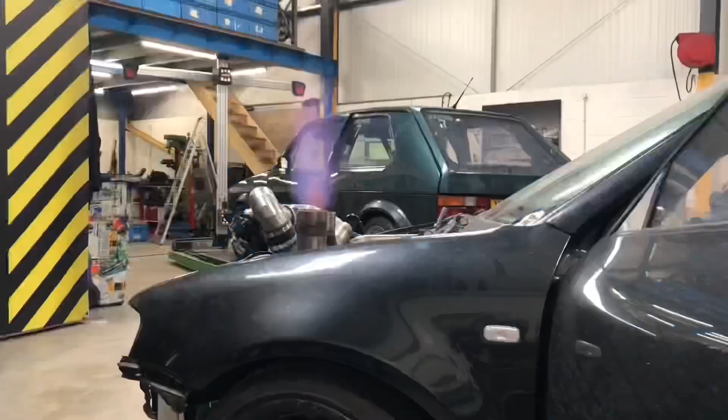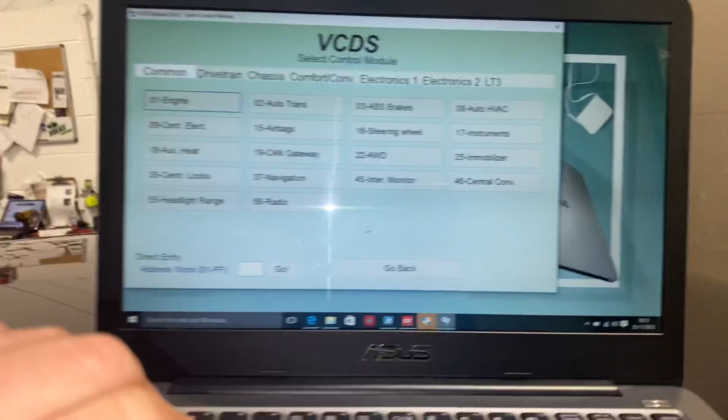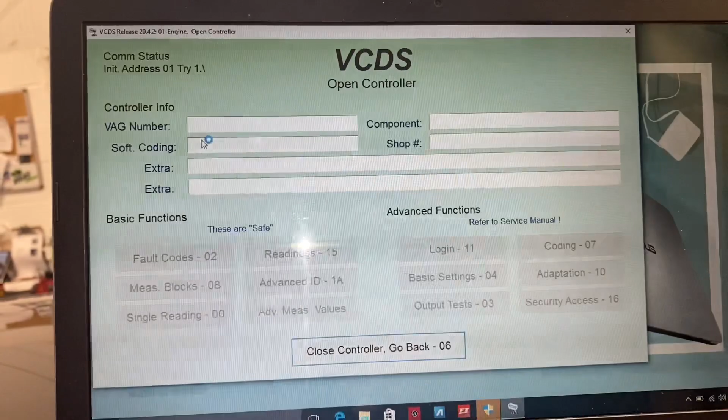Today we've got this Seat Ibiza FR 1.8T in for some diagnostics and a tune. So let's take a look. Every job starts with some pre-diagnostics, so we'll get plugged into VCDS, if I can reach it with my hand. Yeah, plugged in. Let's get that ignition on, and we'll give it a quick engine scan. See what we've got. We've actually got the engine light on, so there is going to be something in here.

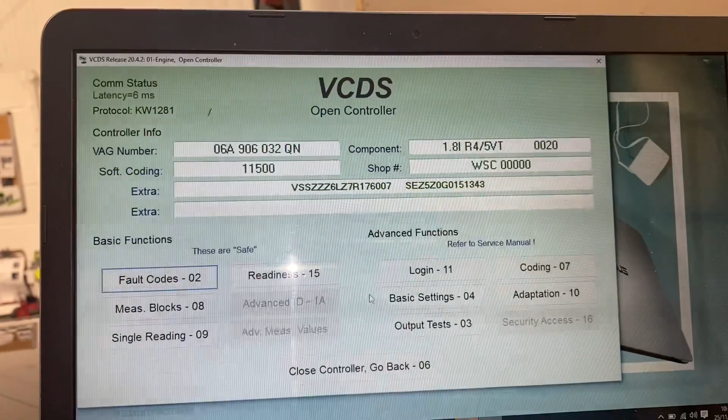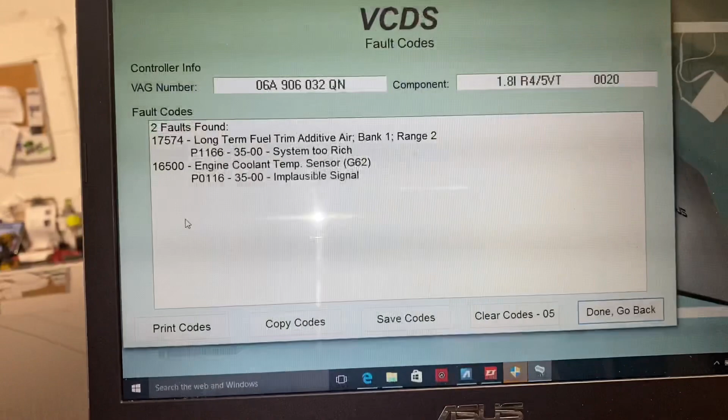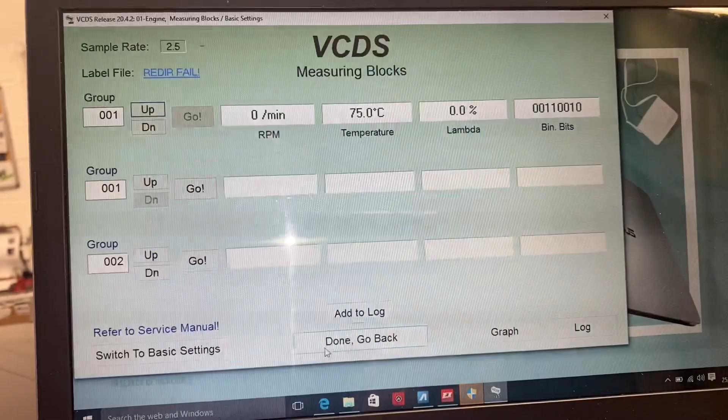Oh, I think I never looked at it then. That's not right, is it? Let's try it again. There we go. Long-term fuel trim, additive air, bank 1, range 2, system too rich, and coolant temp sensor, implausible signal. What does the coolant temp say? 75 degrees. We'll keep our eye on that, see if it dips or goes high during running the car.

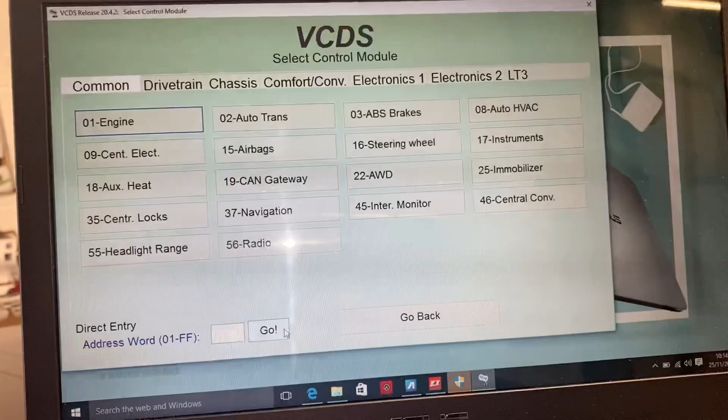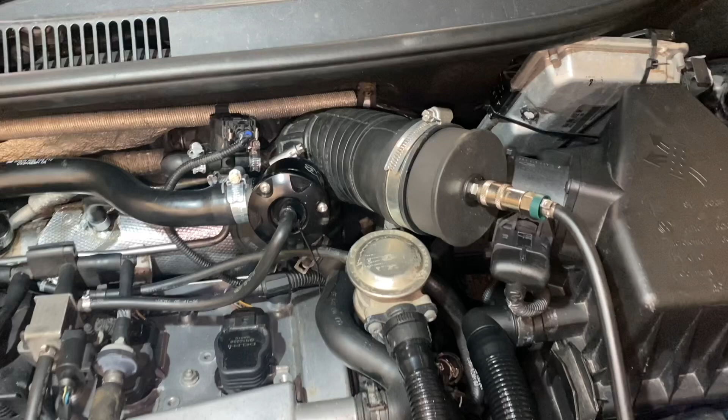Next thing to do is an air leak check. Any 1.8T job should start with an air leak test because they leak from everywhere. Yep, the high pressure test brings up faults, not a smoke test, unless it's a high pressure smoke tester. A lot of them can literally only do about 3 psi, which is no good to us. So we've got the trusty kit on, which is a high pressure kit.

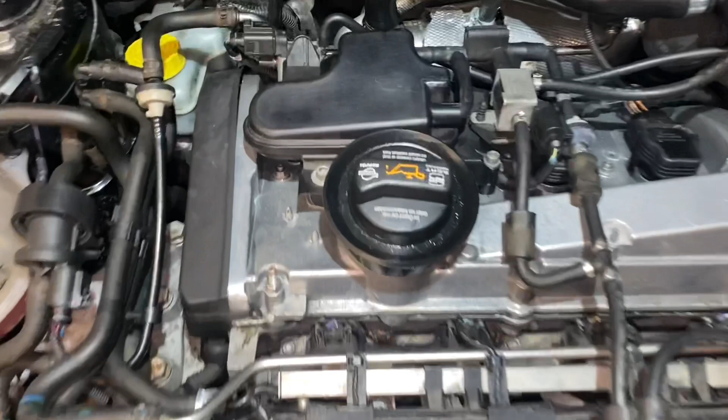Hang on, stop the video. I can see what's wrong with this vehicle. The eagle-eyed viewers out there may be able to spot it already. Look at that oil cap. Who puts an oil cap on backwards? Causes all sorts of problems. Should be golden now. Right, let's carry on.

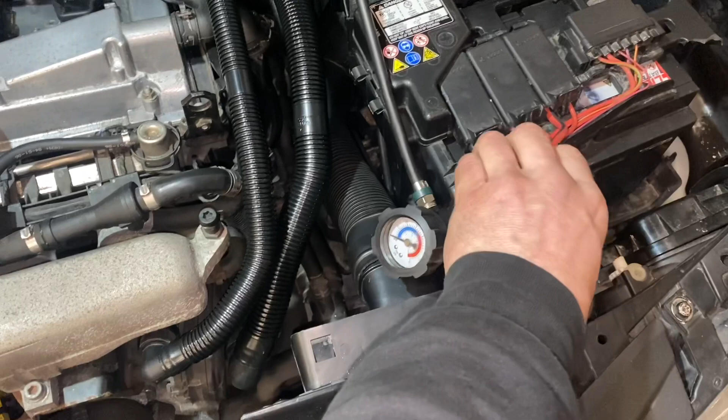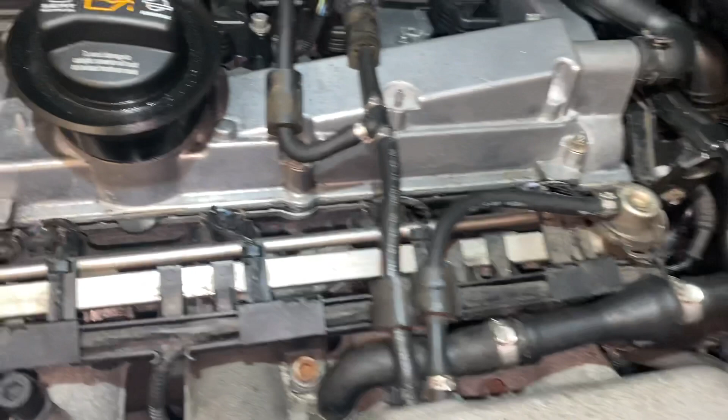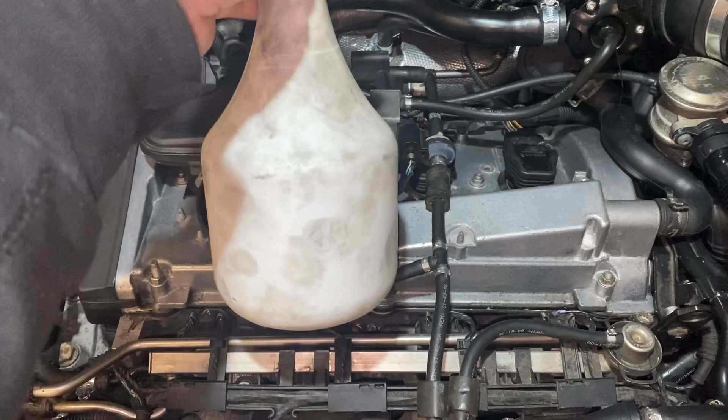So we've got the kit connected. Let's introduce a little bit of air. What are we putting in there? We're putting in 10 psi. Turn it up a little bit. And we've got our trusty patented boost juice, which is secret ingredients: washing up liquid and water. We'll give this a little spray around, doesn't do any harm. Get it in there. Some injector cups down there, intake manifold.

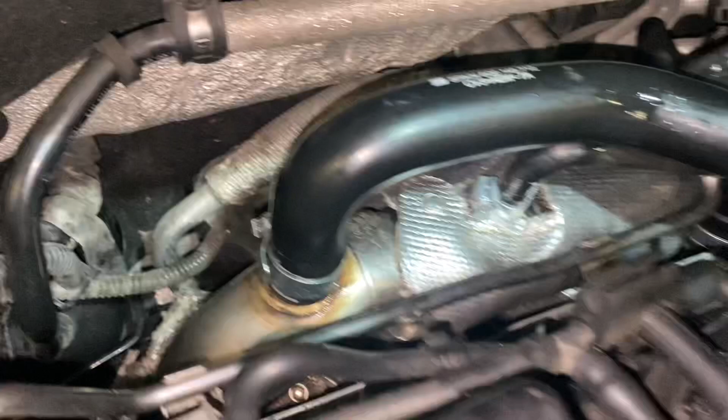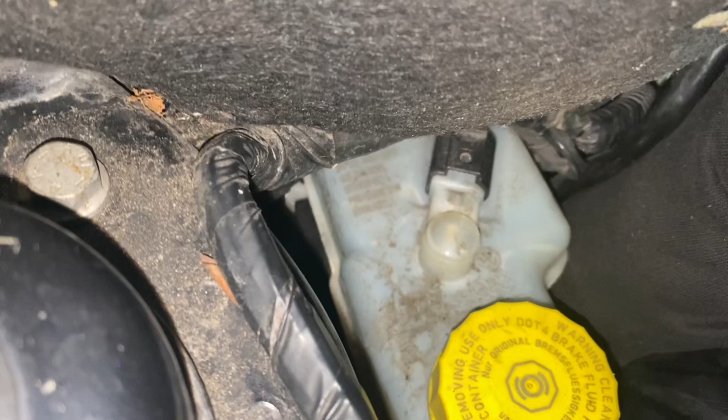I can actually hear something. Let me just have a look down here. Get my hand down here. This has got a push connector down, if I remember correctly. Oh, can you hear that? Oh, it's all oily as well. All right, okay. So, yeah, definitely got an air leak down there. So we'll take a look at that.

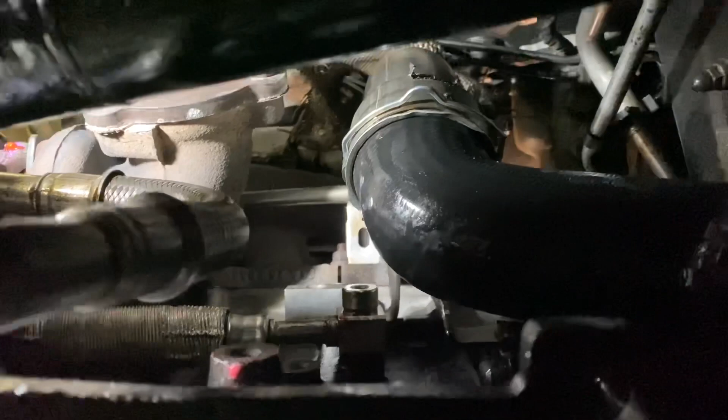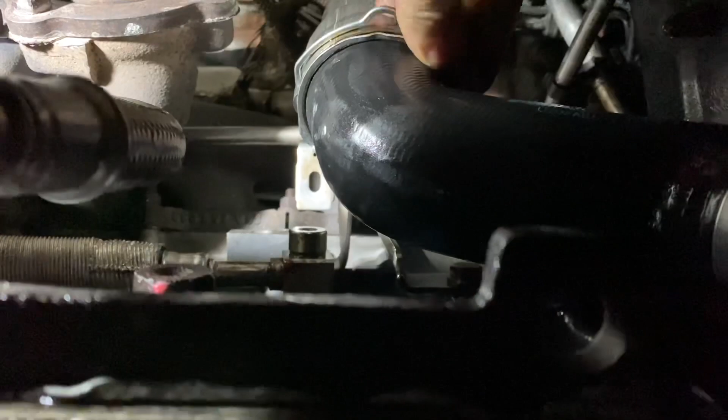All right, so we're underneath the car now. This is the push connector joint down from the turbo, and it's leaking from there. I'm only putting about 13 or 14 psi in there, and it's a massive leak. So we'll get this pipe off, have a look at the seal, and then we'll continue.

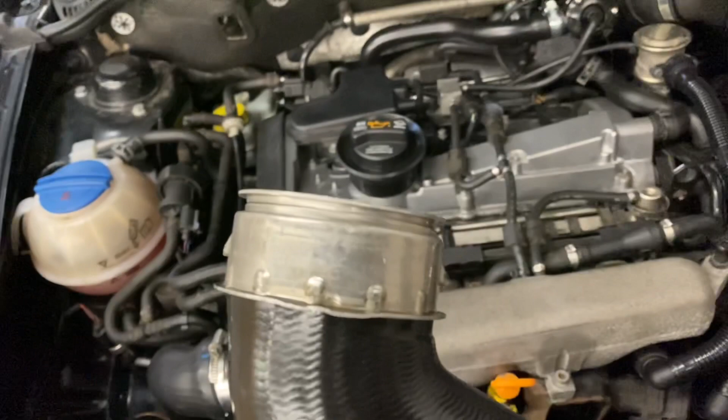Okay, so I've just got that boost pipe off from round the back that was leaking, and there's actually no rubber seal whatsoever on it. Should be around here. It's got 2 lugs that locate the boost pipe. It's kind of like a push bayonet fitting. There's no seal on it. No seal whatsoever. So no wonder it was leaking. I'll go and find some seals and we'll put it back on.

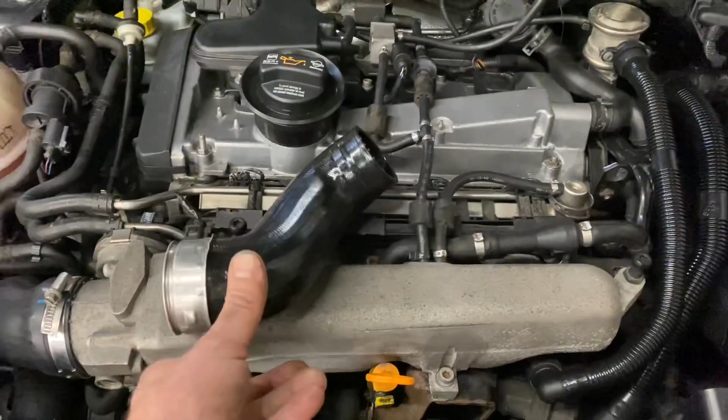As if by magic, I've got a seal in. I'll get this pipe put back on and we'll carry on with our leak test, see if it leaks anywhere else. And we'll go from there. Everything looks and tests okay for the leak check. So we'll disconnect all the kit and I'll get it on the dyno and we'll do some little logs and some pulls and see where we're at.

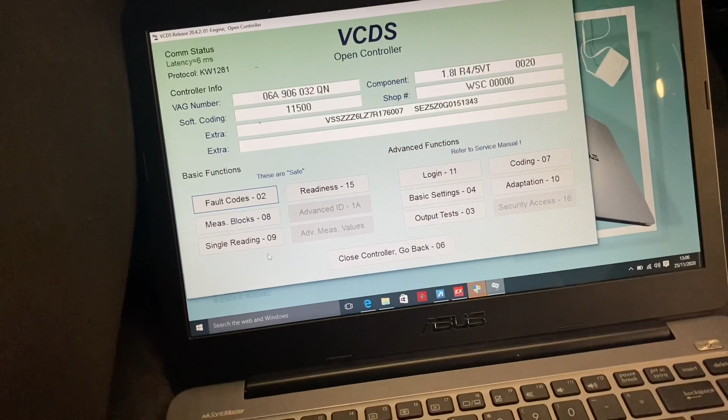Alright, we're on the dyno and we've got it plugged in. I've reset the codes that we had. I saved them, I then deleted them so we can keep our eye on if things come back, and then we've got a note of what faults they were. Keep my eye on that coolant sensor. Right, let's do a couple of pulls.

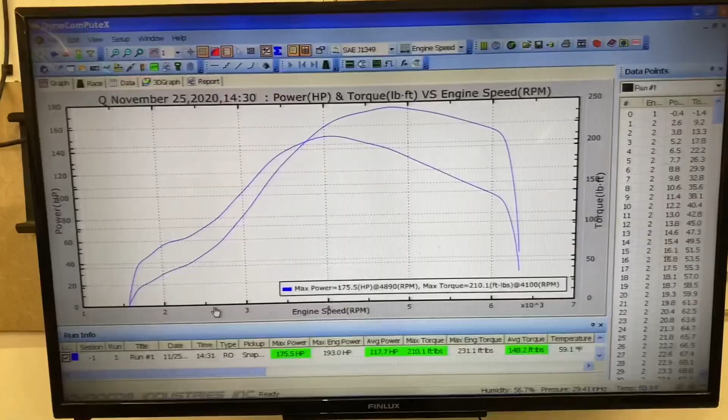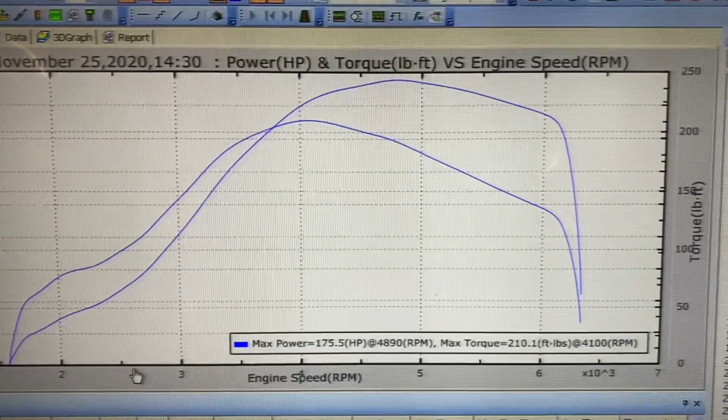So after a couple of pulls, we are at 175.5 horsepower, 210 foot-pound, that's wheel horsepower, and then the calculated flywheel figure down here is 193 and 231 foot-pound of torque.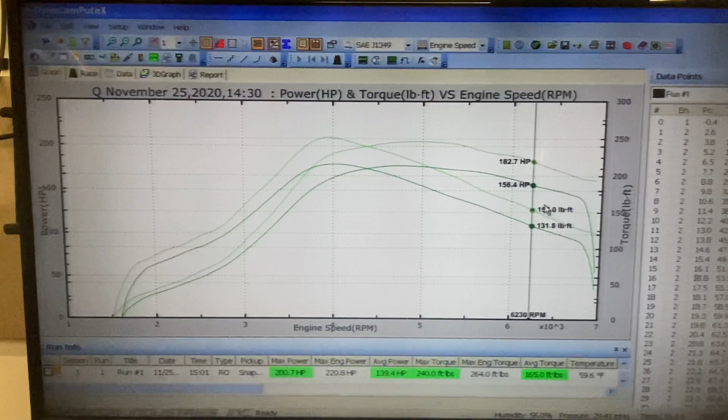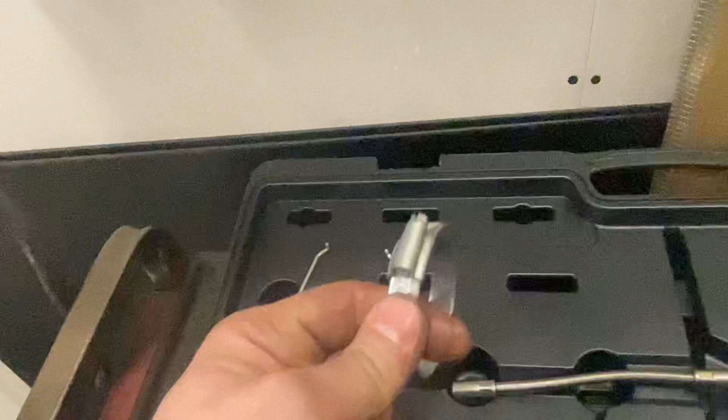A couple of things are replaced on it. The spring clip on the back that held that boost pipe on was actually the wrong one. It's too big, too wide, wouldn't clip in properly. And the other end of that pipe, the hose clip was just spinning, wouldn't tighten up. You know, when you just carry on turning, it just wouldn't nip the pipe up. So I put a new one of them on, with a trusty bendy screwdriver.